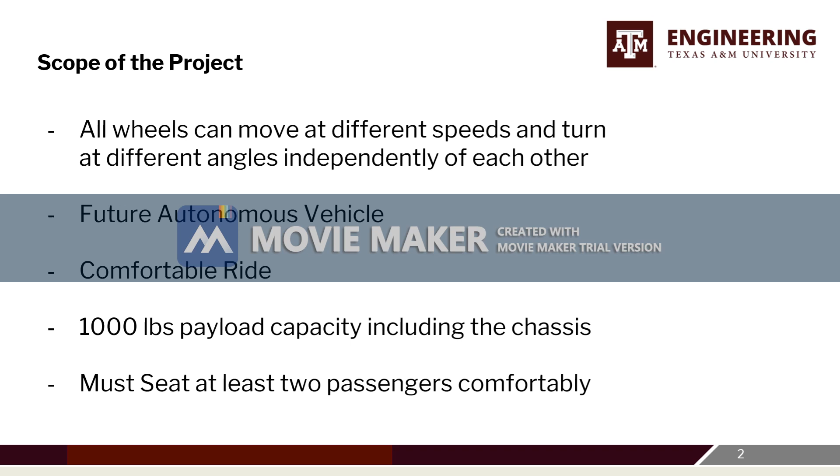The definition of a four-wheel independent steering and drive system is where all wheels can move at different speeds and turn at different angles independently of each other. Eventually, the vehicle will be autonomous and reach all the following requirements.

The first part of any design process is generating concepts to meet the customer's needs. A few examples of proposed ideas are seen here. The standard golf cart design would be one of the most easy to implement options, while the Schaeffler and collapsible canopy offer a more complex design with comfort holding a higher priority.

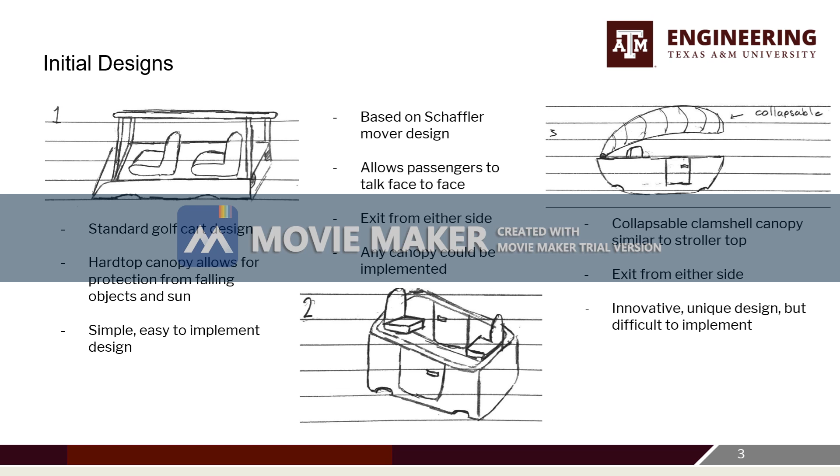After returning in the latter semester, Dr. Sarah Polly had purchased a new, integrated steering and drive wheel that could be mounted to the vehicle. As a result, the system required a redesign of the chassis. To compensate for the amount of time required in the redesign, the canopy and cabin of the vehicle would be stripped to meet time constraints.

Here is our new, already integrated steering and drive motor, the Allied Motion Wheelmax 5097. This new system can turn 105 degrees both left and right, giving a large range of motion. Although this solved many issues, the new motors have a top speed of 3 miles per hour and have little ground clearance.

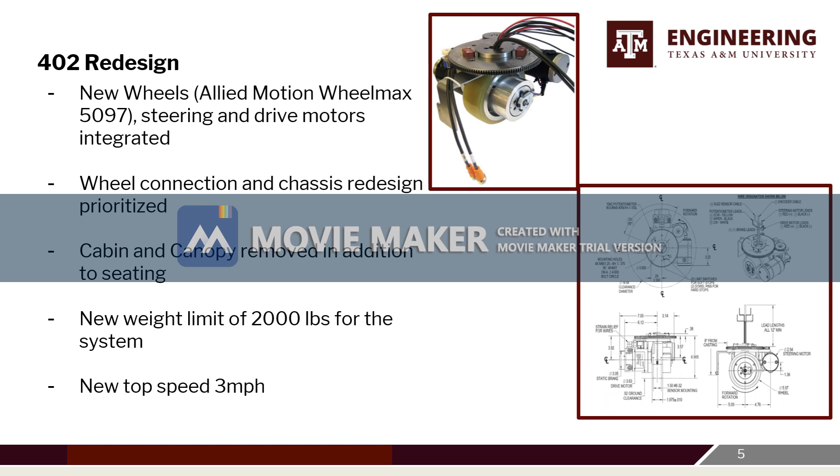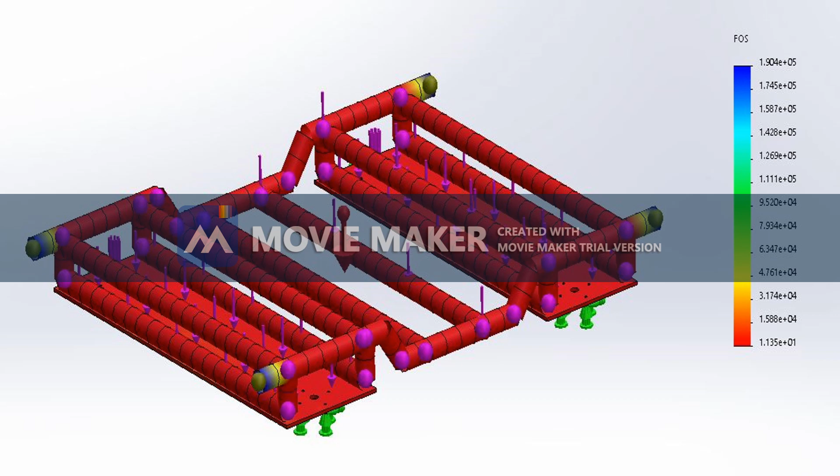The following finite element analysis highlights the new, redesigned chassis. Using aluminum 6061 for the entire system, both a strong and lightweight design have been assured. The factor of safety for this system came out to 11.35 for static load condition. When accounting for dynamic loading of the vehicle, the applied forces were assumed to be an order of magnitude higher, causing our factor of safety to be 1.135.

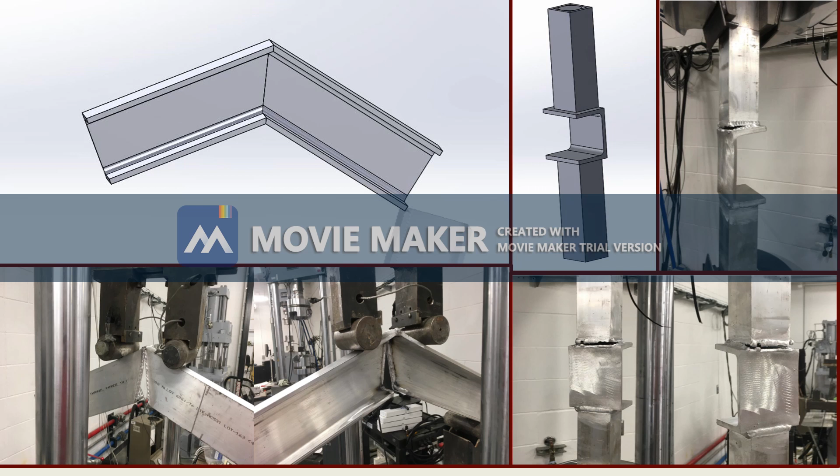In order to check the quality of the welds done by the FEDC, destructive tests were done at the Transportation Testing Institute, located at Texas A&M's Rellis campus. These tests consisted of a bending moment for the elbow joint along the chassis side rails and a tensile test for the subassembly's vertical strut.

The results have been tabulated here, and both the joints performed admirably. The failure load to beat was 5 kips, and all the samples passed the experiment. This gave our team a great deal of confidence in having the FEDC weld our system together.

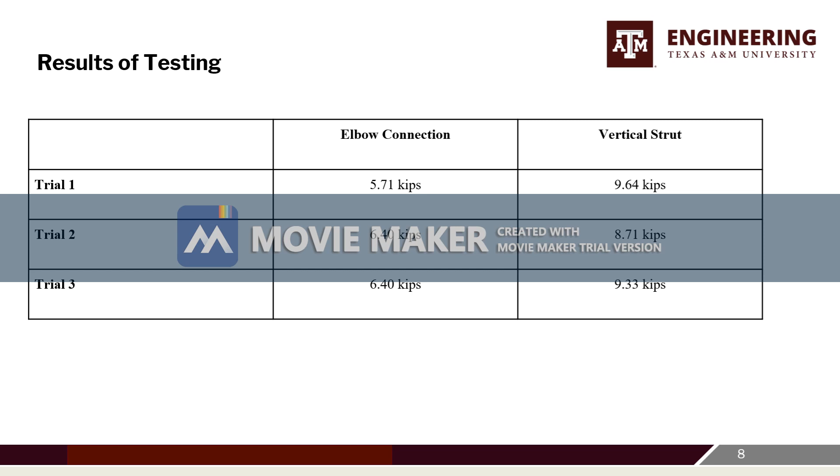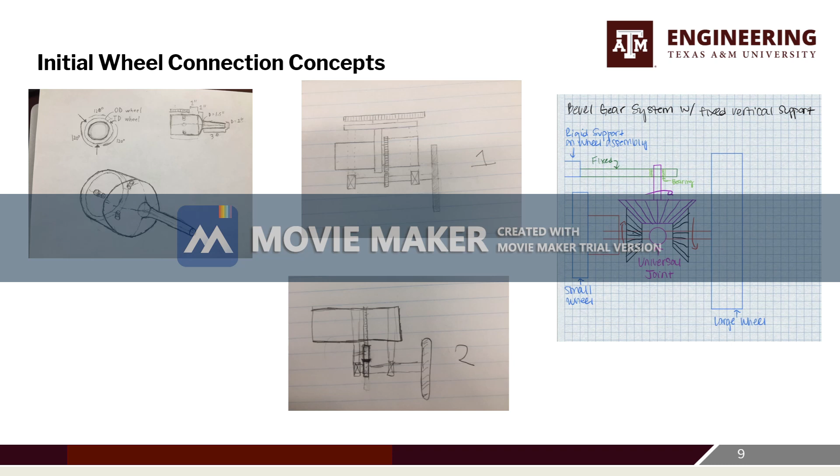As mentioned earlier with the new motors, there was little to no ground clearance, and the top speed was 3 miles per hour. In order to fix these issues, multiple wheel connection methods were considered. One possibility was a hard case that would bolt around the motor, while the others implemented various gear systems. The team decided on the 2 gears wheel connection.

Using the 2 gears coupled with a larger wheel, the system could increase the speed of the vehicle by 100 to 150%. The whole system would be made out of 1015 cold rolled steel, and it passed the FEA with a 1.5 factor of safety. Unfortunately, due to time constraints, the material to fabricate the cage could not be ordered in time, and testing for maneuverability had to be conducted on the original 6-inch diameter wheels.

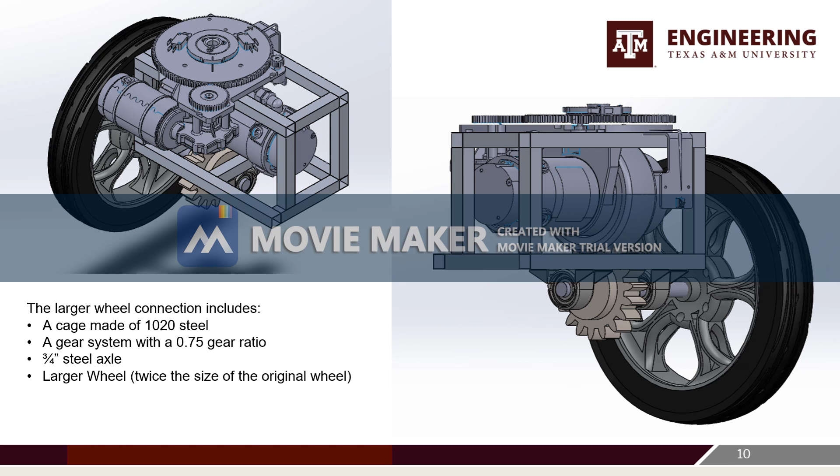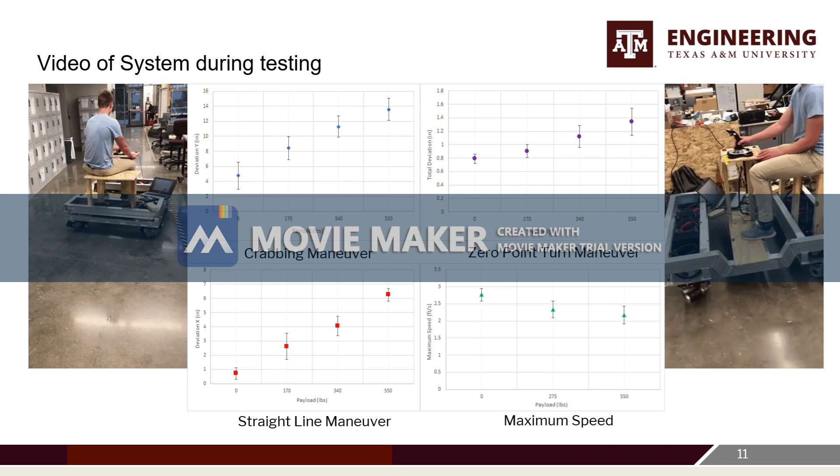Here, the vehicle could be seen during operation. The capabilities include forward, back, and left-right translations, in addition to a 0 radius turn. The vehicle performed all maneuvers with minimum deviations, thus resulting in a successful series of tests.

Lastly, future work for the project includes the implementation of a larger wheel connection to boost the vehicle's speed, the addition of a canopy and cabin to provide a more comfortable ride, and a boost to the aesthetics of the vehicle to make it more pleasing.